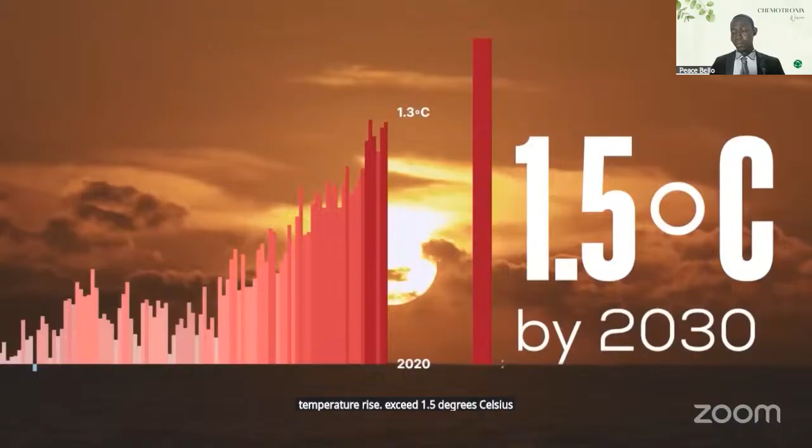Climate change is fast becoming a menace to the world. This is no time to cast blame, but everyone must come together deploying innovative solutions to ensure global temperature rise doesn't exceed 1.5 degrees Celsius by 2030. Reports show that the chances are slim, but with the rapid development of clean tech solutions, the mission to a more sustainable future is possible.

At Chemotronix, we are integrating digital solutions to accelerate the development of clean tech solutions across various communities, fast tracking our journey to net zero. We have built a decentralized monitoring, reporting, and verification system to rectify the current issues plaguing the carbon credit market. Our solution, financing and developing clean energy solutions, will be faster, cheaper, and easier, ensuring a smoother pathway to net zero. The digital technologies currently utilized involve the combined power of AI, blockchain, clean energy, and IoT to offset greenhouse gas emissions.

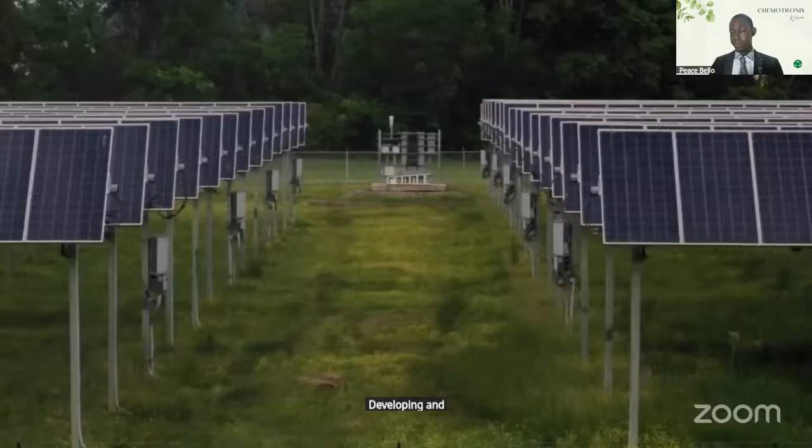Our smart IoT device provides real-time monitoring of GHGs, which will help companies and governments align with their ESG goals. To guarantee authenticity, the data is logged onto a decentralized storage, which will help companies offset GHGs and enable purchasing quality carbon credits from pilot projects developed across the world. Our solution provides a network of collaboration between developing and developed countries, fast-tracking our commitment to tripling renewable energy access across the globe, while drastically reducing emissions to achieve net zero in the shortest possible time.

This will help accelerate biogas, hydrogen, solar farms, and clean tech solutions, creating at least 10,000 jobs over the next 5 years, impacting over 1 million individuals through the instrument of effective climate financing, while offsetting and avoiding at least 100,000 tons of GHGs in the next 5 years. Chemotronix is changing the narrative of the carbon market to achieve our climate goals. Together, let's journey to achieve a sustainable future.

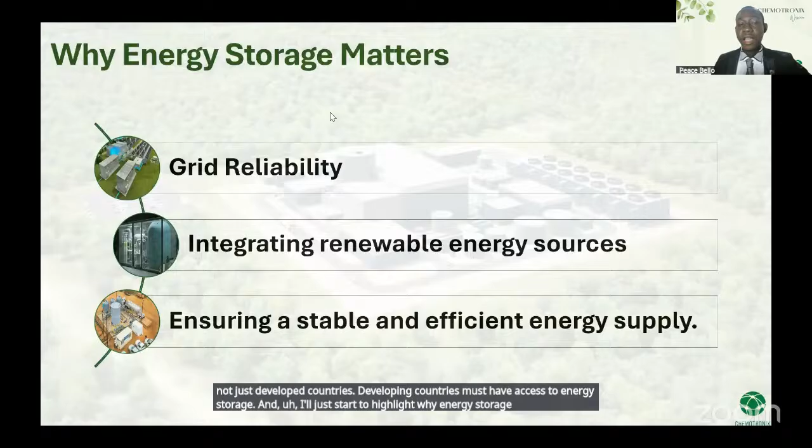But I mean, when we talk of energy access, it has to be across every nation, not just developed countries. Developing countries too must have access to energy storage. And I just thought to highlight why energy storage matters. And one of the crucial points is grid reliability. For instance, here in Africa, we all know how we have intermittent electricity access. And if we really want to have reliable energy supply, energy storage plays a very critical role here.

And energy storage is one of the building blocks that helps integrate renewable energy sources, because you could have hybrid systems that make it much easier to have a stable and efficient energy supply. So quickly, battery storage. We've seen a lot of battery evolution from lithium ion to sodium batteries. We've seen lithium batteries, a lot of even air innovations in the battery space, right? You've had LiO, lithium oxygen, from air batteries.

But one of the major things that stands out for me is if we get battery storage right, we're going to have better system operation. We're going to have much more reliable solar wind systems, and even much more robust mini grids, right? So we want to really ensure that we intensify our efforts to getting battery storage right, because battery storage is also a very critical lever for hydrogen storage, right?

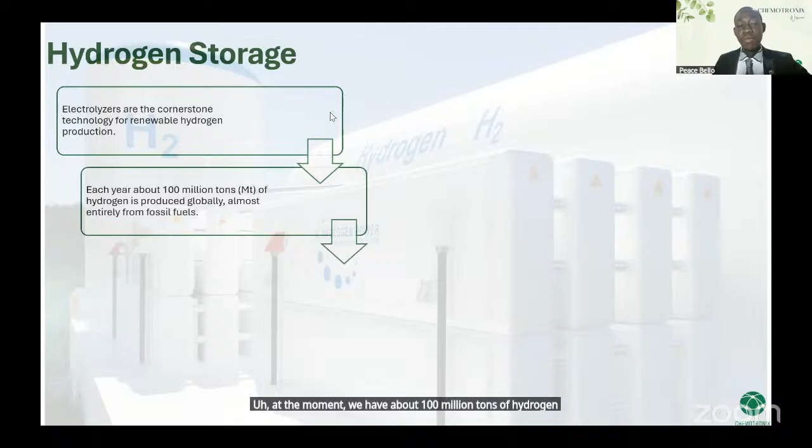Hydrogen does not operate in a silo. Hydrogen depends on renewables, especially if it's going to be very clean. And this is where electrolyzers come in, because if you want electrolyzers to function efficiently, you must have the right energy source to power it in the right way. At the moment, we have about 100 million tons of hydrogen produced globally, but most of it is from fossil fuels, right? And we are talking of clean hydrogen in the world, right?

So if we really want to have clean hydrogen, we must shift away from fossil fuels to having hydrogen from water, which requires an electrolyzer. And this shows that we have a lot of work to do, because at the moment, if we want to have 10% of renewable hydrogen in the market, you're going to need about 100 gigawatts of electrolyzer capacity. And this speaks a lot to the kind of efforts which we have to deploy in coming years.

And hydrogen poses a very crucial building block for industries like steel, shipping, and also ammonia, right? So these are the three industries that seem to benefit a lot from hydrogen in coming years. And again, data also shows that little work is being done in Africa. You have most of the efforts being done in China and Middle East.

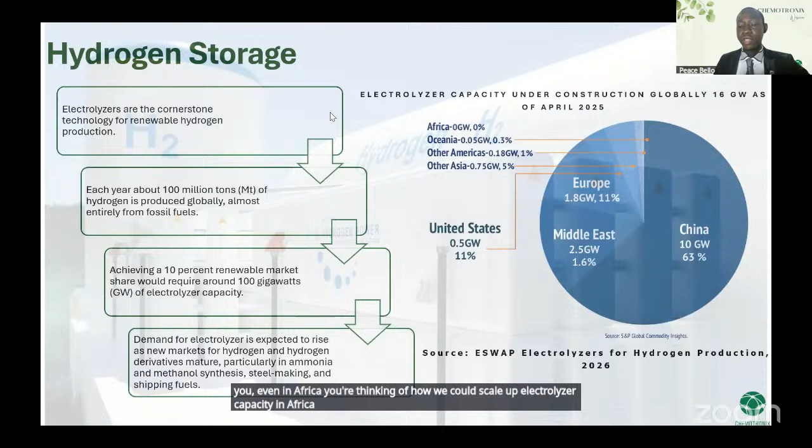So this webinar is very good. It's very informative for you. Even in Africa, you're thinking of how we could scale up electrolyzer capacity in Africa, right? I'm very sure you're going to learn a lot in this webinar session today, right? It's not to bore you too much on data.

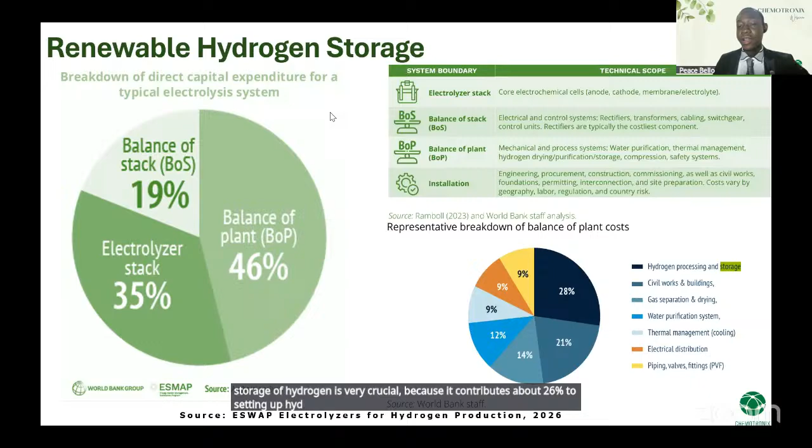Storage of hydrogen is very crucial because it contributes about 28% to setting up hydrogen infrastructure, right? So you want to ensure you play a very crucial role in hydrogen storage, because it plays a very foundational role in the balance of plant system boundary, as highlighted on this dashboard, right? So we could share this slide later for you to read more.

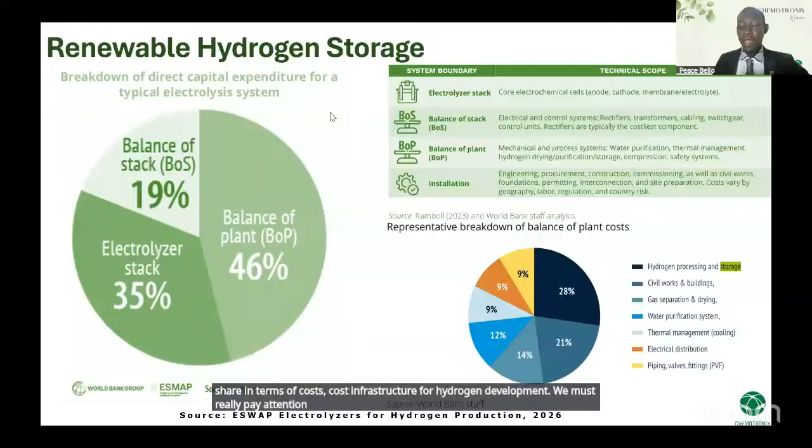But all I'm trying to point out is that hydrogen storage is very important, and we cannot push it to the backside if it is contributing the largest share in terms of cost infrastructure for hydrogen development. We must really pay attention to it in subsequent months and also in our locations, right?

And people have argued that hybrid energy systems still offer the most robust solution, because when you collocate a battery system deployment infrastructure with hydrogen infrastructure, with solar, with wind, you have the best cost savings, and you have a lower electricity bill, you have a lower demand charge, and you have a higher PV self-consumption. So you can see all these things are intertwined, and these are things that we must harness for a very rapid development across the globe, right?

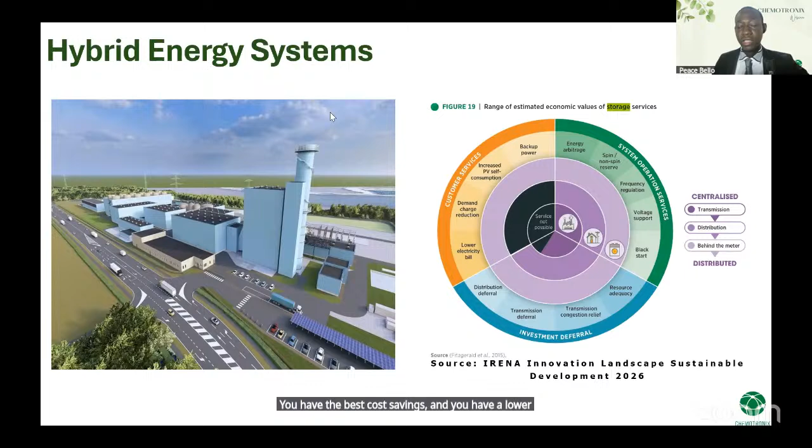So the challenges we've been facing are majorly about costs, supply chain, storage, and transportation, and these are things we must double down on in coming years. All right. So at the moment, hydrogen is still not as cost effective as you have for direct EVs. And this is a very, very major challenge of how we could reduce the cost of hydrogen to the barest minimum for consumers across the globe. And it's an ongoing effort.

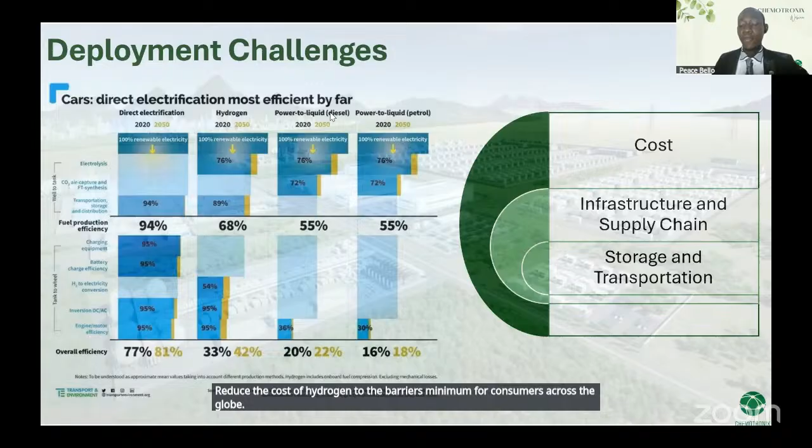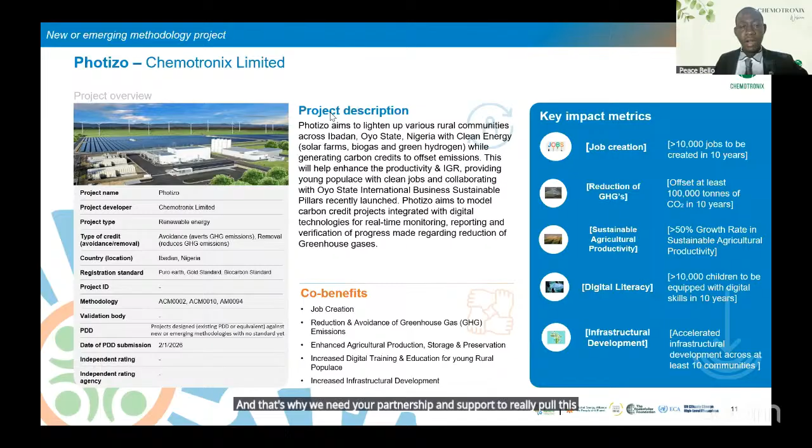And that's why as Chemotronix, we try to design a project which we really hope we could launch very soon. We want to see how we could collocate solar farm, biogas, and green hydrogen here in Nigeria, in Oyo State, right? So we're really looking at how to accelerate this development, and that's why we need your partnership and support to really pull this up, right? So I'll be sharing more on this on our website, so you could read more about the project to see how you could partner with us, right?

So what's the way forward? We've said a lot about the problems, the current situation. Battery recycling must be done in the right way. We also want to have a lot of battery storage projects because this is very crucial for hydrogen generation. And again, policy plays a very crucial role, and research cannot be pushed to the background, right? So we can see how all these things connect together. And I really hope that we really pay attention to the experts here to see how we could all leverage solutions in our various communities and various organizations to take hydrogen and battery storage to the next level.

Thank you very much. Energy storage is very crucial for the future we want. So let's build a sustainable future together. And I hand over now to Bolu. Thank you very much.

Thank you so much, Peace. That was a very, very insightful welcome address. I'm sure we all learned a lot, especially with the energy storage tripling in China. And now we know why energy storage is really important, especially for us who reside here in Africa.

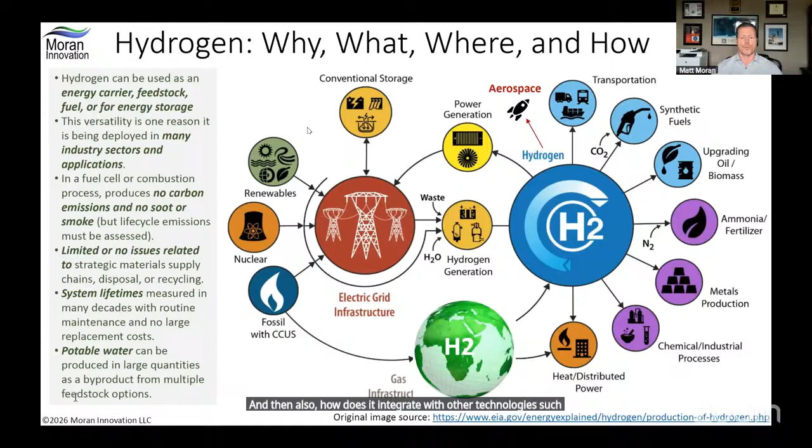So a quick background on hydrogen. Some people seem to think hydrogen is a new thing because it's new to some of these different sectors. But the reality is that hydrogen systems have been around for a very long time. Jet engines were initially developed in Germany in the 1930s using gaseous hydrogen as the fuel. It was easy to ignite and easily throttleable. In the 1950s, a liquid hydrogen jet engine with afterburner was developed and successfully ground tested by Pratt & Whitney. And then there was a series of flight tests also done in the 1950s.

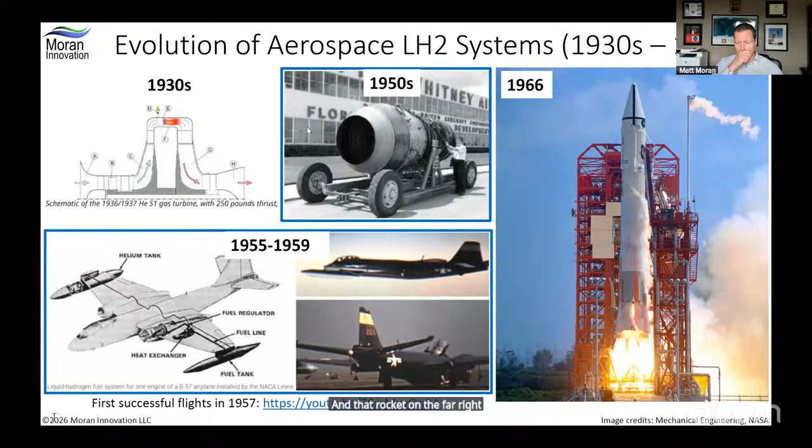That flew liquid hydrogen for the first time using an unmodified jet engine, with liquid hydrogen on one wingtip and helium for pressurization on the other. Then in 1966 was the first rocket that had an upper stage with liquid hydrogen in it. That's the Centaur upper stage, and that rocket on the far right-hand side, but I forget now what the payload was. I believe it was a satellite.

And it continued then through the Apollo era. So the top two upper stages, the second and third stage of the Saturn rocket that was used for all the Apollo missions, were liquid hydrogen fueled rocket stages, both of them liquid hydrogen and liquid oxygen. You can see at the top middle there a cutaway of the tanks that were used and the common wall between those two propellants. At the bottom left is actually the fuel cell that was used to provide the astronauts in all the Apollo missions all of the electricity, heat, and water that they used during the missions to the moon.

And the bottom middle, a little bit more towards the middle, is the fuel cell that was used on all the shuttle missions. And that provided all the electrical needs for the shuttle orbiter when it was on its missions in low Earth orbit. So there's a lot of history there.

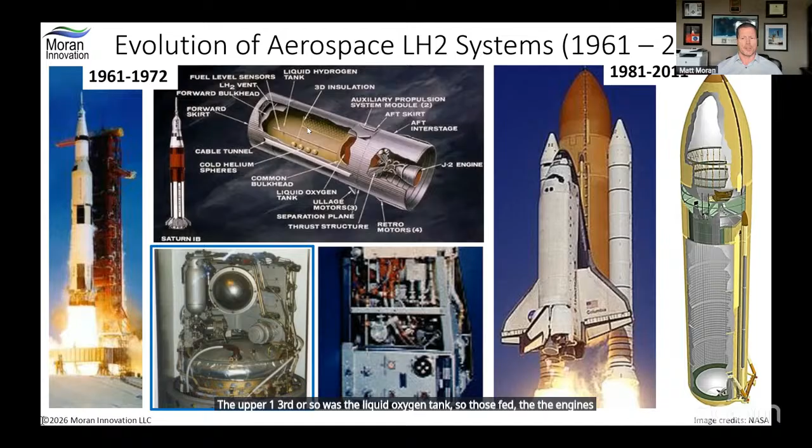On the right-hand side is a look at the shuttle program that was between 1981 and 2011. The cutaway of the large brownish tank there, called the external tank, is shown on the far right. The lower 2/3 or so of that volume was liquid hydrogen. The upper 1/3 or so was the liquid oxygen tank. So those fed the engines on the orbiter themselves that helped launch it into orbit. And that continues in the space industry.

On the far left is the Artemis 1 depiction. Artemis 2, of course, is about to launch next month and will be the second launch of this system. This is a full core liquid hydrogen, liquid oxygen stack, so that's first stage and second stage. There's solid rocket boosters on the side, the smaller white side-mounted propulsion systems. And then I just want to point out at the bottom far left there, that is the largest operational liquid hydrogen system in the world. I was on the design team for that.

I like to point this out because this represents 60 years of large-scale life cycle use of liquid hydrogen that has really tackled all the enabling technologies required for these systems. What's really driving now into other sectors, and what's important, is bringing down the cost, improving and increasing the supply chain for all the other different sectors where these systems can be put in place.

A few more on the far right there. I won't go into great detail, but it isn't just NASA. Around the world there's a variety of different rockets that use liquid hydrogen in both stages, like the Ariane 5 and now the Ariane 6, as part of the European Space Agency, or India for their rocketry, as well as commercial rockets such as the upper stage of Blue Origin and ULA.

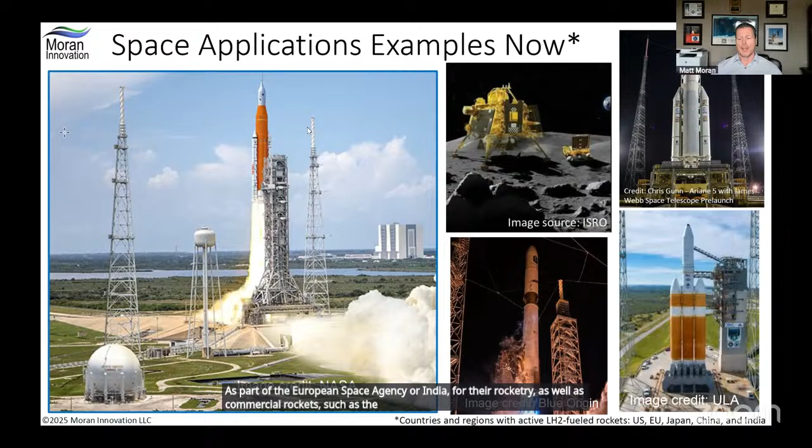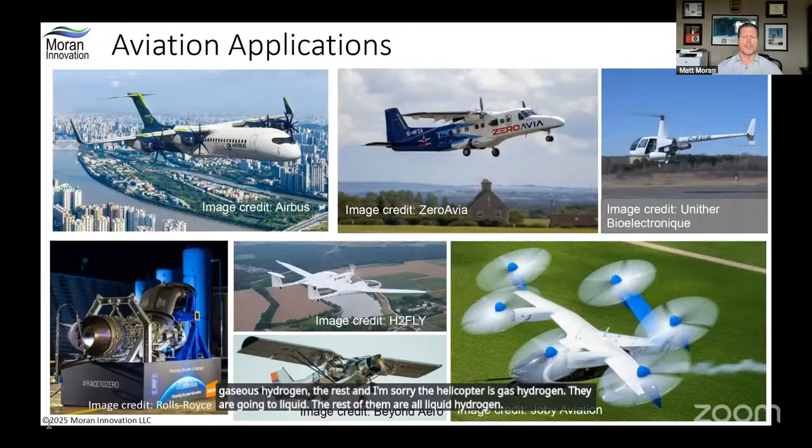As an example, the bottom left there is a Rolls-Royce jet engine that's been ground tested with liquid hydrogen. The rest of them are all in-flight photographs of various aircraft from various organizations within the last few years who have successfully flown. In this case, the Unither helicopter is gaseous hydrogen; they are going to liquid. The rest of them are all liquid hydrogen aircraft, and there's reasons for that I'll touch on in one of the further slides here. Of course, aviation isn't the only place.

Industrial transport applications, large-scale applications like this, where the weight of other options such as batteries starts to become economically and performance-wise not desirable, is where hydrogen is really beginning to get a lot of traction. And again, these are all photographs of operational systems here that I'm showing, actual photographs.

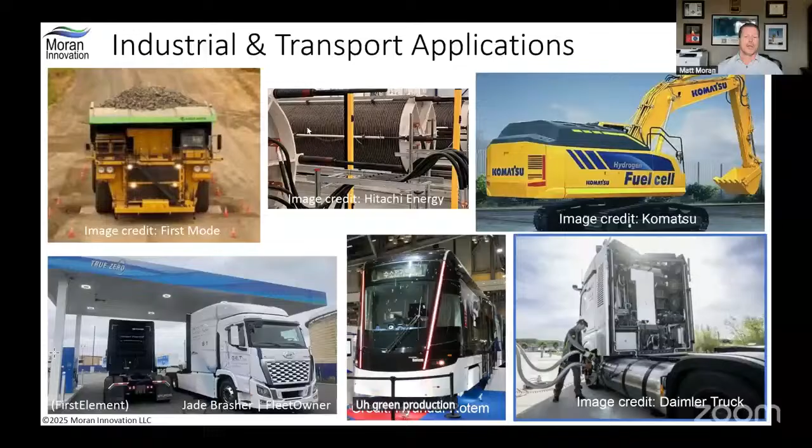There is one Hitachi Energy one in here. Steel making, as I think Peace pointed out in his presentation, and other industrial processes have used hydrogen for a long time. What's really changing now is where is that hydrogen coming from, and of course driving towards more green production of hydrogen or carbon reduction if you're doing carbon capture.

Other applications getting a tremendous amount of traction is in maritime, various shipping vessels of all types, as well as import and export trade deals and development that is rapidly increasing right now to take hydrogen produced where there are a great deal of local resources, say solar energy, and then producing the hydrogen, liquefying it, and then transporting it similar to the way liquid natural gas is transported now to locations that don't have those resources but want the hydrogen for their end use cases.

So an example of that was a few years ago, a successful demonstration of delivery of liquid hydrogen from Australia to Japan. And now there's a great deal more of those kinds of vessels and trade deals that are happening around the world, particularly in the Middle East, producing liquid hydrogen that will be shipped to other locations that need it.

A little bit more about some of the infrastructure and liquefaction. There's a paradigm shift here that I want to point out. In our current oil and gas paradigm, you have separate locations where you have extraction of the fuel, then you have to ship it somewhere to then refine it, and then you've got to distribute it to where it's going to be fueled and so forth.

Hydrogen has a different paradigm. It can be produced in a separate location, which is kind of what the legacy companies have done for many years, Linde, Air Products, Air Liquide. But you also have the option of producing hydrogen where the point of use is. And some of these systems that are coming out now not only produce the hydrogen in situ or at the location of use, it can also be liquefied at that location.

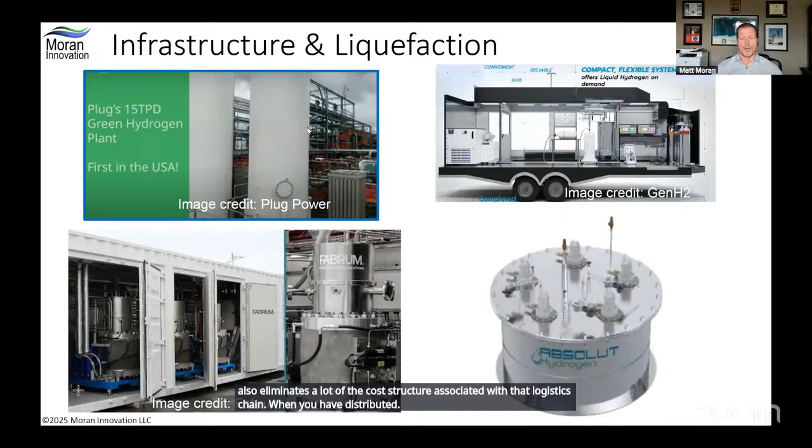Peace touched on this. This is my one slide snapshot of looking at it from a different aspect. These are several years old, but there are a couple of studies that were done. On the left-hand side is wind power, on the right-hand side, solar. And one of the things it demonstrates is that adding additional wind turbines or additional solar panels does not take away the inherent intermittency or variation of the power generation that these renewables produce.

So right now, what that means is, in a lot of cases, they have to be curtailed. In other words, that power is not used when the demand isn't sufficient, and you have to build out your system such that you can handle the highest demand load. So that's where energy storage starts to come in.

Various estimates are usually around 30%. When your grid has 30% or more of these intermittent renewables as part of the generation mix, you start to need to bring in storage to really optimize the system so that you can store that energy and then use it when the demand is there, but now your sun has gone down or your wind has reduced. So that's the crux of where storage comes into play.

I will point out, and again, this was in Peace's presentation, wind and solar is the lowest cost of electricity method of bringing on new capacity by far. It's not even a close competition. So as he alluded to, if you go back even 10 years ago, lots of people were saying solar and wind was not economically viable. It was never going to be cheap enough. And of course, they were all wrong. It's not only cheap enough, it is completely the lowest potential way to bring on new power.

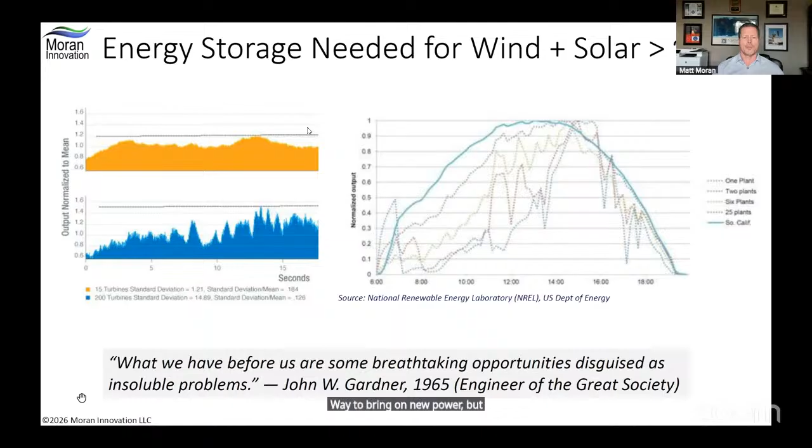But this storage, energy storage, is a big piece of it. So when you're looking at energy storage, you have some options. I'll just go from left to right. So this is a chart of capacity, power capacity of your energy storage when the demand goes up. So this is how you can deliver that from storage now to your power demand.

And then on the bottom axis is the discharge duration. So which of these energy storage methodologies you use, or what combination of them, is going to be driven by your application and your capacity and discharge duration, as well as other parameters. But this is one way to look at it that I think is interesting.

So if you go from left to right, you can see things like supercapacitors or flywheels are quite good at a certain capacity range and for short time periods when you need to discharge that stored power back to your grid or microgrid. Batteries cover a lot of ground, up to like a day or maybe a few days, and up to fairly large capacities, 100 megawatts or more. So they're the right solution for a lot of cases.

When you start to get up to much higher capacities, though, in the gigawatt range, and durations going from weeks to, let's say, a full season, where you might want to store energy that you created during the summer, let's say in northern latitudes where there's a lot of solar radiation, but then in the winter when it gets cloudy and the days are shorter, you need to have that storage available then to follow your demand. Then you've got to go to other solutions.

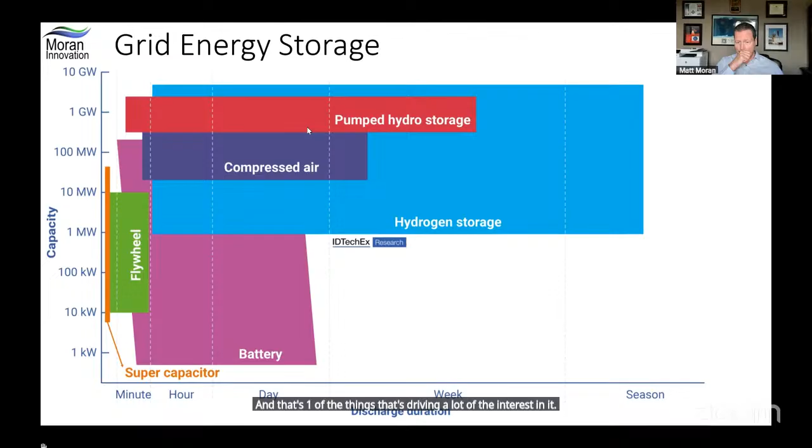Hydrogen storage is the largest option in terms of covering a lot of ground in capacity and discharge, and that's one of the things that's driving a lot of the interest in it for grids, microgrids, and now the data center build out that's happening with AI, as well as other things like reliability.

So it begins with your inputs. What energy are you using? What water sources are you using? Or are you using biomass or other feedstocks? Because you can actually create hydrogen without water.

You can also use geologic hydrogen, which I won't talk a lot about in this presentation, but is now gaining a great deal of momentum because there's more and more discoveries of underground geologic hydrogen that renews itself automatically over some period of time, and it will drive the economics quite a bit if it becomes feasible to get a great deal of hydrogen extracted from the ground, lower than $1 per kilogram by some estimates.

Then you have to take that combination of inputs and you need to generate your hydrogen, and there's a variety of methods to generate it, and then store it. And you also have some byproducts. Most of those are commercially viable products to sell, depending on what those feedstocks are.

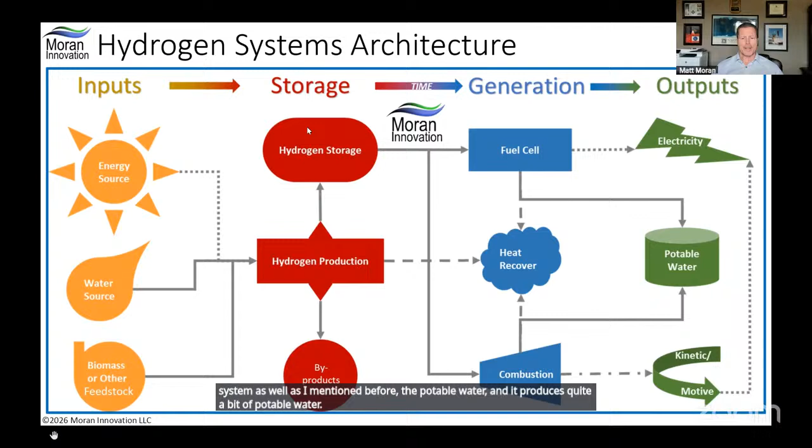So with that kind of overall architecture and thinking about what a hydrogen system end-to-end looks like, let me just show you a few examples of some of these feedstocks. So as was mentioned earlier, steam methane reforming, which is basically natural gas, has been the way that hydrogen has been produced for many, many decades. Now, if you look at the far left-hand side, there's a lot more attention and a lot more demonstrations being done with carbon capture, utilization, and storage. That's what CCUS stands for.

So these are sometimes, I'm not a fan of the hydrogen colors, I'll be honest, because I think they tend to smear over a lot of variables that should be looked at very carefully. But people call that sometimes blue hydrogen. You're basically capturing the carbon in some way, shape, or form, and then of course you've got to do something with that carbon. In the middle are some of the bio-waste methodologies I mentioned. Pyrolysis falls into here, as well as lots of other reactions where you can take things such as agricultural waste or even animal waste, and you can produce hydrogen from it.

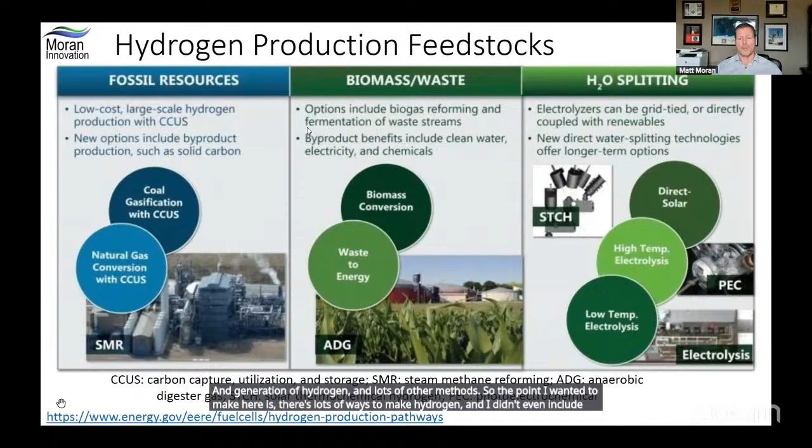And then the one on the far right is what more people are familiar with: electrolysis, electrolyzers. But there's also direct solar, and that's a lower level, earlier technology that's still being developed. But there are some methodologies looking at nano-engineered materials where you can do direct solar conversion and generation of hydrogen, and lots of other methods. So the point I wanted to make here is there's lots of ways to make hydrogen, and I didn't even include geologic hydrogen, as I mentioned before. So you've got to keep that in mind as you're looking at these systems and what makes the most sense.

These are some of the different ways hydrogen can be stored. I won't go into details here other than to say that which one of these methods you choose depends on your application and your operational concept. So the different ones are going to make sense for different types of applications. Liquid hydrogen, just for example, when you want to put a lot of hydrogen on board something like a large mobile application such as a ship or a train, that's where liquid hydrogen begins to become the best solution for that. But there's other ones like underground storage when you're talking about large grid storage that makes more sense.

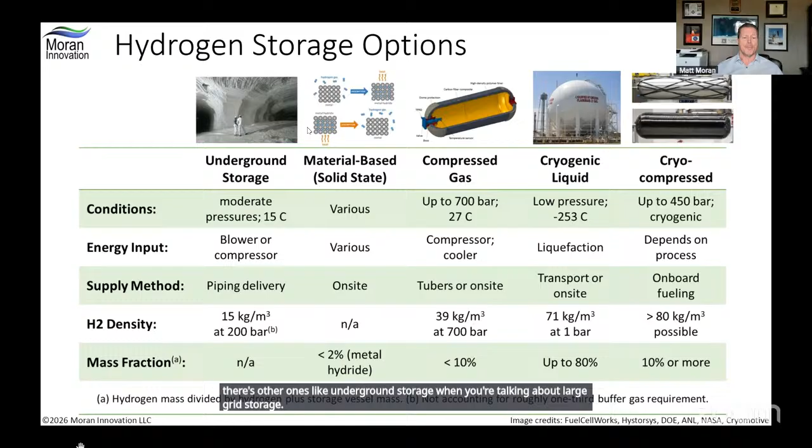I'll touch this briefly. Most people, I think, are familiar with this, but sometimes this gets lost a little bit in the discussions too. The two ways that I mentioned that you can use outputs. On the left-hand side, there's a fuel cell reaction. So you've got hydrogen and oxygen that goes in, oxygen generally coming from the air, and if it's from air, then it has nitrogen. Out comes that water we talked about. The nitrogen comes right back out as nitrogen again into the air, and then you get electricity and then heat as your other outputs to that process. This is the most environmentally friendly, let's say, method of utilizing hydrogen.

On the right-hand side is combustion processes. Now, some processes can't be electrified with fuel cells, batteries, or anything else, or don't make sense to be electrified. Industrial processes, for one, jet engine propulsion, although there are some hybrid methods that are being looked at. But in a combustion process, you've got the same things on the left-hand side of your equation coming in, and you still have water and nitrogen coming out and your heat of combustion that you use for whatever your purposes are. But you also have NOx, and that is a greenhouse gas. And NOx is produced in any combustion process.

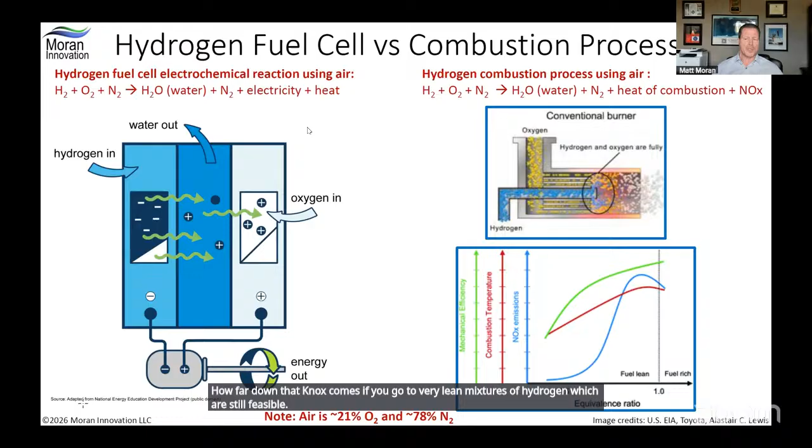It has to do with the high temperatures that disassociate nitrogen and oxygen in air, and when they recombine, they form NOx. The interesting thing about hydrogen is, because of its large flammability range, you can get to extremely lean mixtures, and you can drop that NOx down to very low levels that you can't come even close to with any other fuel. So that bottom chart kind of implies that if you look at the blue line, that's the NOx emissions, you can see how far down that NOx comes if you go to very lean mixtures of hydrogen, which are still feasible in mixtures you wouldn't be able to do with any other fuel.

But I'll take a little less time on these. I just want to show how this plays together a little bit. We talked about that overall architecture. This is an example of a system built from that architecture. This was, again, about 10 years ago on a coastal or island type application that my company was looking at,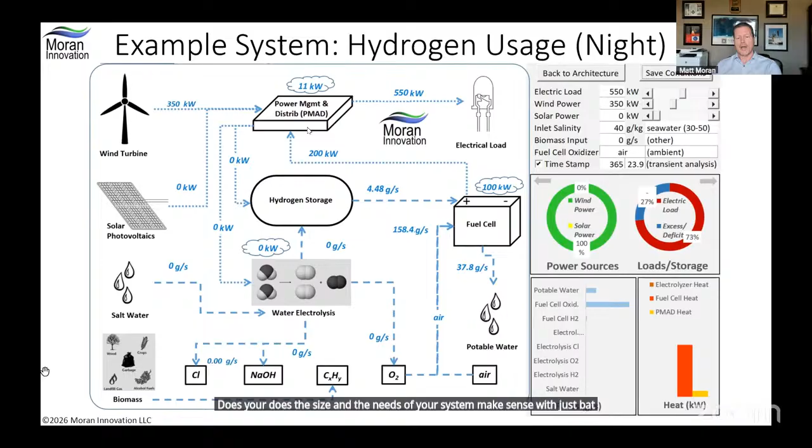And there's other things on this particular software that I developed for this, and I used candidate numbers. These aren't the actual numbers. I didn't want to show any confidential data for the customer. So these are just candidate numbers, but it gives you a sense of how you balance that storage. And again, a battery system will do the same thing. It's just a matter of, does the size and the needs of your system make sense with just batteries, or with batteries and hydrogen, or some other combination?

A few more quick examples. This is something I think is, again, unique to hydrogen. It's the opportunity, if you look at the bottom far right there, of meeting energy security and food security and mobility capabilities all in one system. And this was an example of a team I put together to go after Department of Energy funding. We did not get it. We were in the competitive range, but we didn't make the final cut.

But I still think it shows, so this was going to be in Hawaii, and it was an agricultural based application. So we were going to provide power to an agricultural area for their various systems, hydrogen offtake for their equipment, tractors and other agricultural equipment, fueling for cars and vehicles in Hawaii, as well as potable water for irrigation, all with one system.

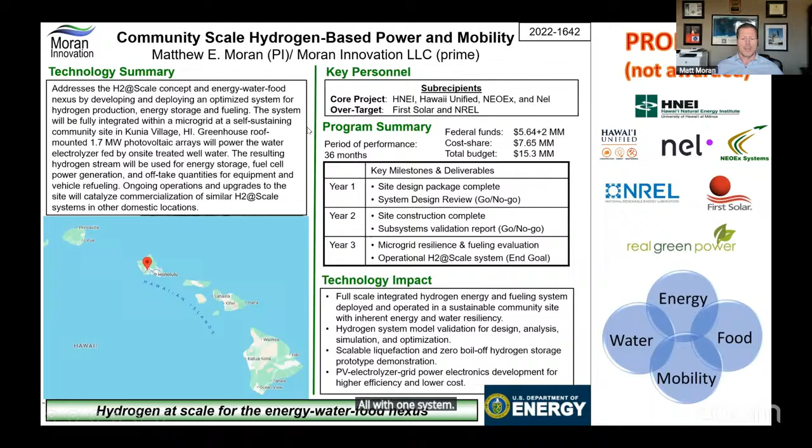We did get, however, or I am supporting now over the last couple of years, another hydrogen microgrid system, this one also in Hawaii, a very different application, but this is a system that already has lithium-ion battery storage. And our contract was to add hydrogen storage to increase the storage capacity of the overall microgrid. This microgrid already provides all of the power for this particular part of this base.

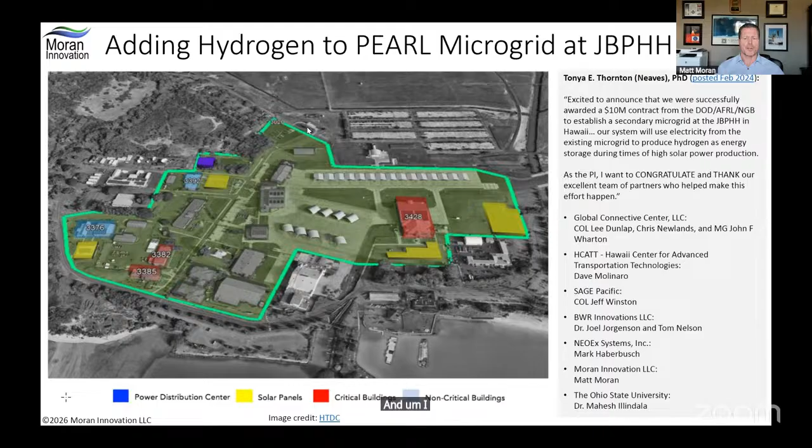I think I have one more slide. Yes. And this is a kind of siting overview of where that hydrogen microgrid and the exclusion zone around it for safety reasons would be sited in this particular example. The PDC is the power distribution center that's part of the current microgrid.

And on the right-hand side are some of the publicly shared specifications out of the Clean Technica article back in May 2024. 1 megawatt electrolyzer, 600 kilograms of hydrogen stored. Some of it is compressed hydrogen, but also part of what we want to demonstrate is the ability to liquefy on site. So this is all on site. It's taking water supply on site, doing all of this, including liquefaction.

And then we want to demonstrate the ability to provide that liquefied hydrogen to various types of aircraft or vehicles that are on site. It also has 600 kilowatts of PEM fuel cells and some of the other hydrogen safety and operational procedures and so forth. And the techno-economic analysis was part of that.

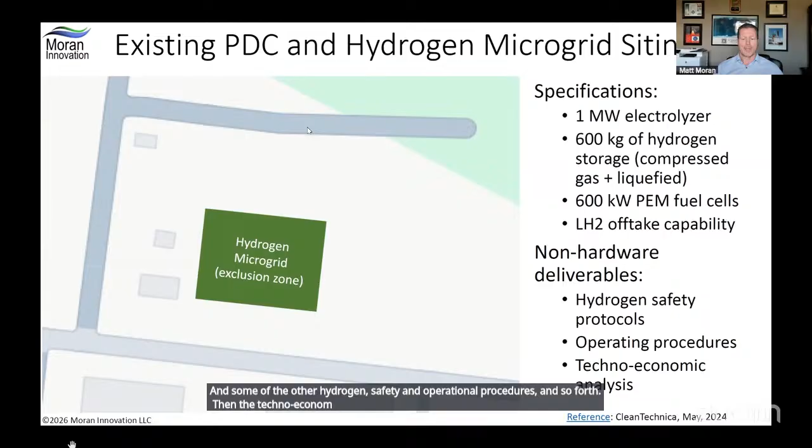So I'll cut off with this. This is something I put together to help people remember some of the key aspects of hydrogen. I call it the 2020 vision for the countdown to hydrogen. So I'll let you read through this later if you'd like to. I do include 5 safety tips that are critical for hydrogen systems. The last 2 only apply to liquid hydrogen.

It has to do with the temperature and phase change that's very prominent in those systems that you have to be aware of. And then on the left-hand side, I'll just point out, this is sort of the dual challenge, both the opportunity and challenge with hydrogen. It has very high gravimetric density, which means the specific energy per unit mass is 3 times higher than legacy fuels.

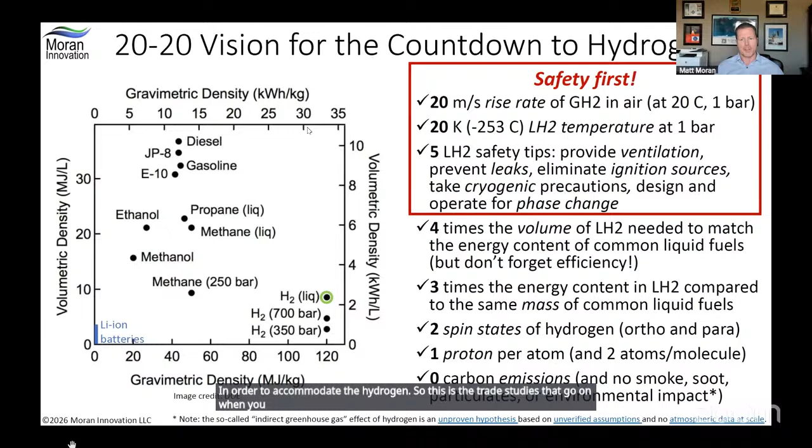So this is why mobility applications are of such interest, because you can have that energy on board for much lower weight than you would for any other fuel, and certainly much lighter than you would for a battery. But on the other hand, it has a very low volumetric density, so energy density, which means that you have to have larger tanks in order to accommodate the hydrogen. So this is the trade studies that go on when you're actually designing and developing the systems and then deploying them. And with that, I'll stop here and really looking forward to the Q&A session.

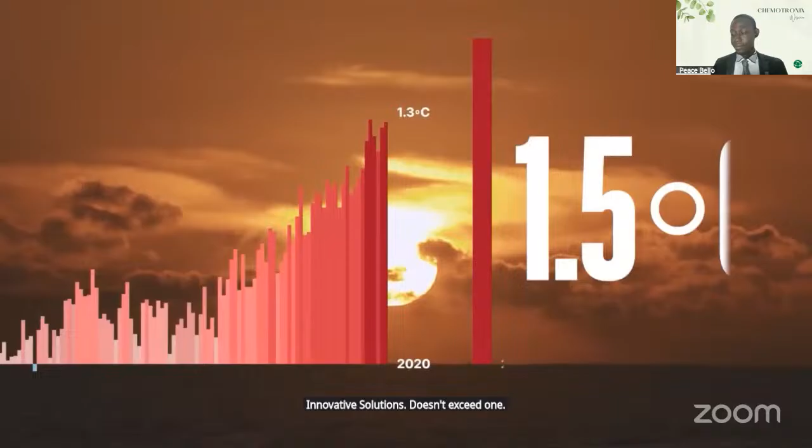The effects of climate change are fast becoming a menace to the world. This is no time to cast blame, but everyone must come together, deploying innovative solutions to ensure global temperature rise doesn't exceed 1.5 degrees Celsius by 2030. Reports show that the chances are slim, but with the rapid development of clean tech solutions, the mission to a more sustainable future is possible.

At Chemotronix, we are integrating digital solutions to accelerate the development of clean tech solutions across various communities, fast-tracking our journey to net zero. We have built a decentralized monitoring, reporting, and verification system to rectify the current issues plaguing the carbon credit market. With our solution, financing and developing clean energy solutions will be faster, cheaper, and easier, ensuring a smoother pathway to net zero.

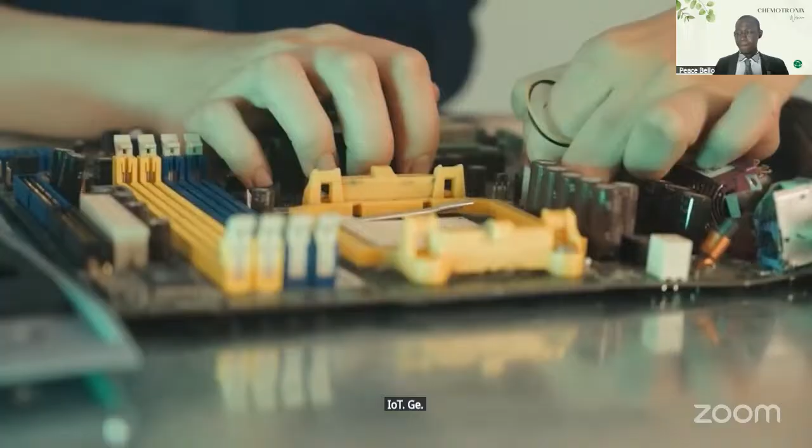The digital technologies currently utilized involve the combining power of AI, blockchain, clean energy, and IoT to offset greenhouse gas emissions. Our smart IoT device provides real-time monitoring of GHGs, which will help companies and governments align with their ESG goals. To guarantee authenticity, the data is logged onto a decentralized storage, which will help companies offset GHGs and enable purchasing quality carbon credits from pilot projects developed across the

Our solution provides a network of collaboration between developing and developed countries, fast-tracking our commitment to tripling renewable energy access across the globe, while drastically reducing emissions to achieve net zero in the shortest possible time. This will help accelerate biogas, hydrogen, solar farms, and clean tech solutions, creating at least 10,000 jobs over the next 5 years, impacting over 1 million individuals through the instrument of effective climate financing, while offsetting and avoiding at least 100,000 tons of GHGs in the next 5 years.

Chemotronix is changing the narrative of the carbon market to achieve our climate goals. Together, let's journey to achieve a sustainable future.